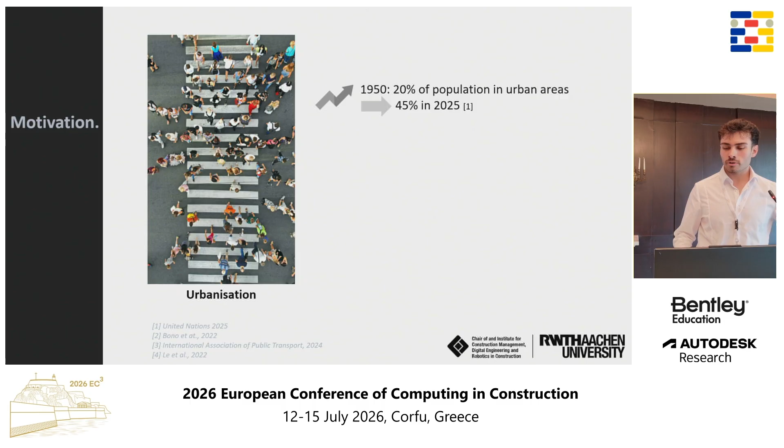So to start, let's look at some numbers on why metro tunnels are particularly interesting, especially from a sociological perspective. We can see that in the past 75 years, from 1950 to 2025, the urban population has moved from 20% of the global population to 45%. And in a similar period of time, from 1950 to 2015, the cumulative global length of metro tunnel systems has increased more than tenfold, from 1,250 kilometers to over 13,000 kilometers in 2015.

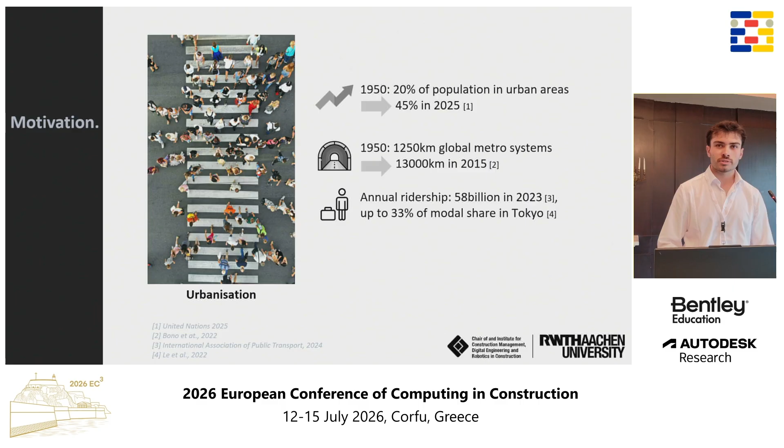And as part of that, we can observe that metro tunnels have become a crucial part of urban transportation, resulting in an annual ridership count of 58 billion in 2023, accounting for up to 33% of the modal share in major cities such as Tokyo.

Now, the second aspect is related to the maintenance of the tunnel. We already established that there is a substantial amount of metro tunnel systems available, and now they need to somehow be kept operational. Due to material aging, heavy loads, and general environmental conditions, these infrastructure buildings are prone to building damages, which are required to be inspected and potentially maintained.

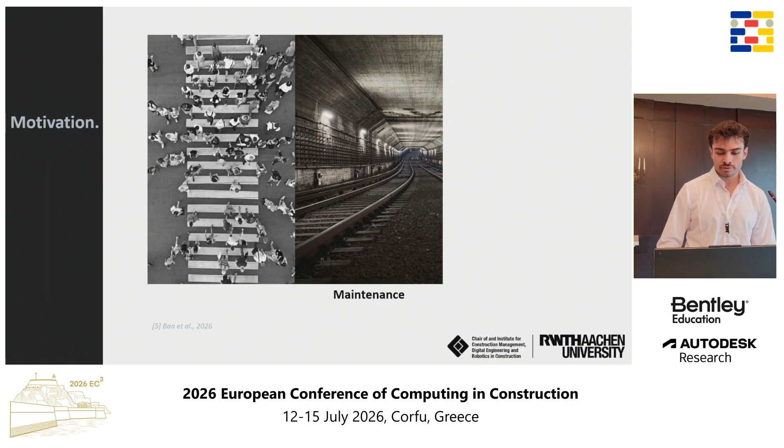I don't know if anyone has ever been inside a metro tunnel and had the opportunity to assess the conditions of them, but at least for German metro tunnels, since a lot of them were built after either the First or Second World War, they're often in, let's say, improvable conditions. So what you will find often is damages in the form of cracks, leakages, cross-section deformations, and thus regular inspections are required to assess the building conditions, plan investments, and allocate repair as well as maintenance resources.

Third, we have operational constraints that are unique to metro tunnel environments, such as timely limited inspection windows, which are during the nightly shutdowns of metro systems, and metro-specific ground conditions, including the tracks, ballast, and cross ties on the surface of the metro tunnels, and these create fundamentally different conditions compared to, for example, road tunnels.

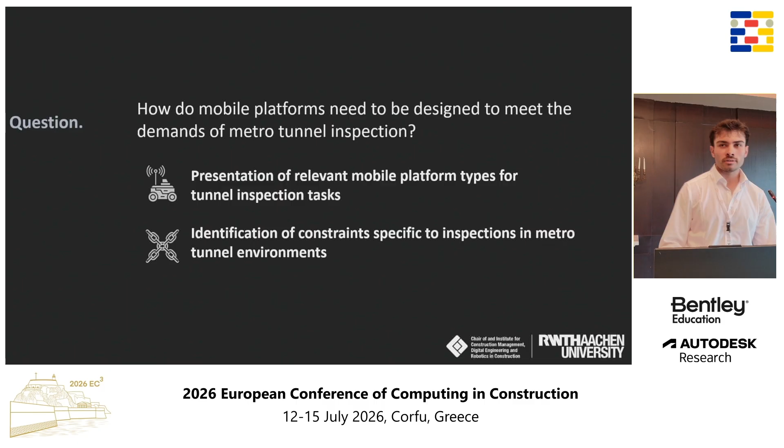So concluding these aspects, the paper focuses on the question of how mobile platforms need to be designed to meet the demands of metro tunnel inspections. To answer that, we look at three subtasks. The first is a presentation of relevant mobile platform types for tunnel inspection tasks. Afterwards, we look at the specific constraints that metro tunnel environments impose on automated inspection systems, meaning how inspections of metro tunnels differ from inspections of road tunnels, for example.

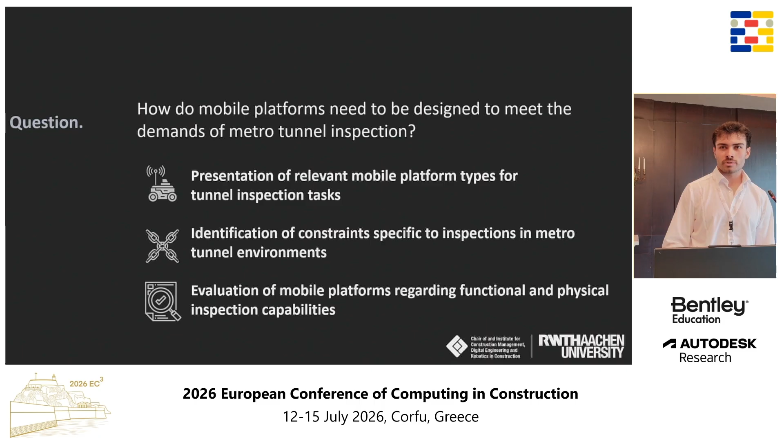And lastly, we will evaluate the mobile platforms against these constraints by looking at functional and physical capabilities of the platforms to assess how suited they are for metro tunnels. Now, before we do so, let's also take a look at the methods we use to gather our information.

We used a mixed method approach, including a literature review to identify existing mobile inspection systems that have already been developed for road tunnels, railway tunnels, and metro systems, and extract key technical parameters such as payload capacity or runtime. Then we selected publications based on the maturity of the described systems, with the goal of identifying relevant mobile platforms for automated inspections as well as their key system parameters.

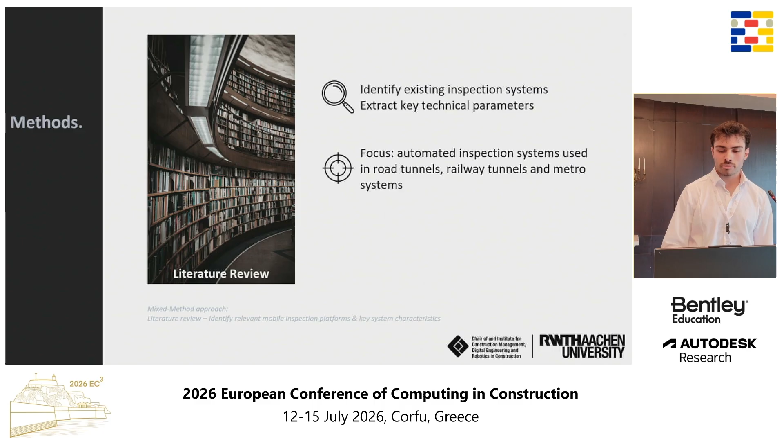Then we conducted semi-structured interviews with metro tunnel operating agencies whose participants had a broad range of tasks, from planning and scheduling to practicing on-site inspections themselves, and more organizational topics such as asset management. The main goal was to establish existing maintenance procedures and conditions currently used in practice, as well as to gather insights into operational constraints that are not represented in literature otherwise.

In total, we interviewed 6 members of German metro tunnel operating agencies, following an interview guideline on organizational processes of metro tunnel inspections, current maintenance strategies, handling of inspection data and reports, as well as operational constraints within the inspection process.

Then lastly, we got our hands dirty and did some in-person observations inside German metro tunnels during regular inspection and maintenance windows. These focus on the physical environment and infrastructural conditions inside the tunnels, documented through photos and videos, with the goal of identifying requirements that would otherwise be not represented or underrepresented in literature.

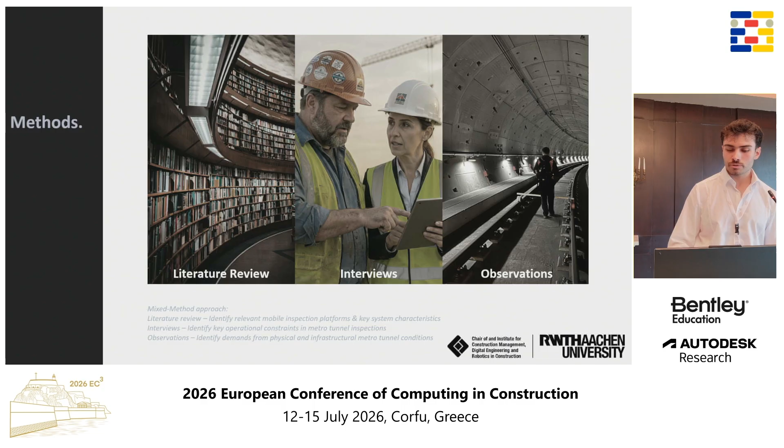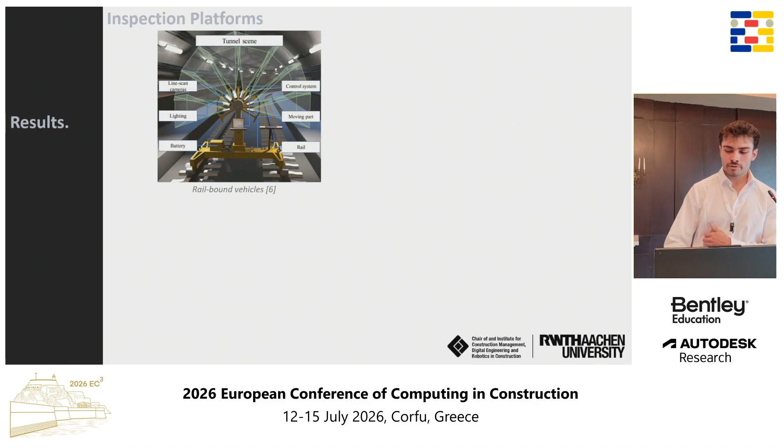Now let's take a look at the results. Starting with the inspection platforms that we identified, they can generally be classified into 4 categories. The first category can be classified as rail-bound vehicles, meaning inspection platforms that, as the name suggests, use the tracks of the metro tunnel for transportation. The second type will be summarized as wheeled and tracked robots, so any platform that uses either wheels or tracks.

They usually offer good performance in payload capacity, meaning large sensor setups can be integrated with relatively simple motion control, but they generally lack movement flexibility. Third, we have quadruped robots that mimic the motion capabilities of 4-legged animals such as dogs, which allows them to be more flexible with their movements at the cost of less hardware payload and higher integration effort due to the complex joint systems.

And lastly, we have inspection systems mounted on UAVs, meaning they are able to fly through the tunnel and can thus operate independent of what the surface conditions on the ground look like.

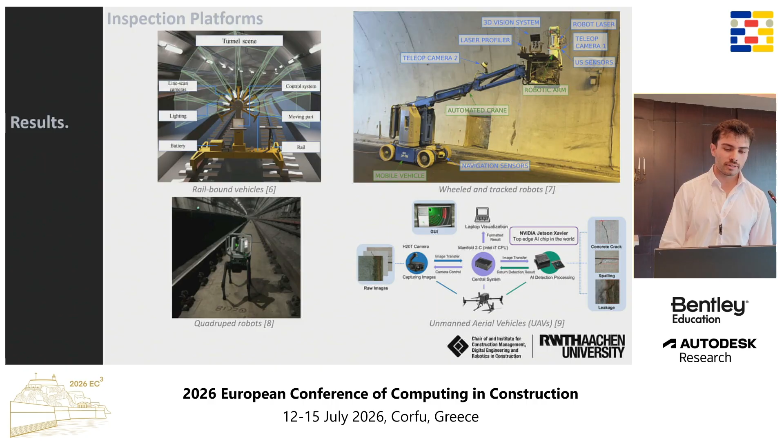Now, after establishing the main inspection platforms, we want to take a look at the specific operating constraints that we have for metro tunnel inspections, since they will usually largely differ from the conditions that we have, for example, in road tunnels. Now, the constraints are separated into 3 different domains, depending on the information source that we use to acquire a specific constraint. And starting with the literature-based constraints, we first have the fact that within metro tunnels, we operate in a GNSS-denied environment, meaning we can't rely on satellites to localize ourselves during automated inspections.

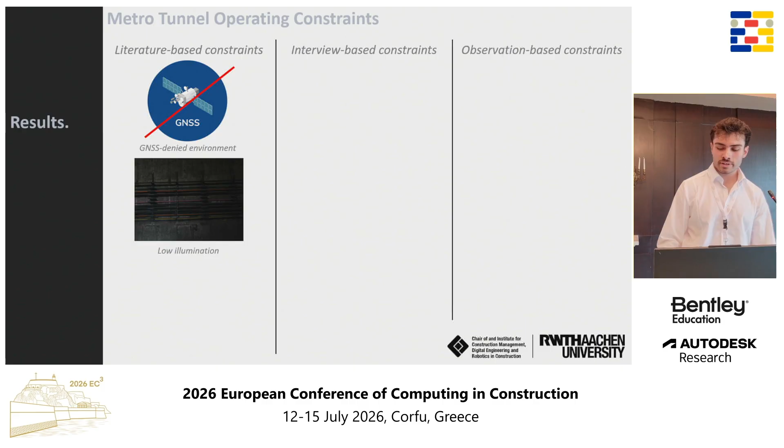Next, we have 2 aspects that go into a similar direction regarding the physical conditions inside the metro tunnel, which is low illumination, since the trains usually don't need any light to operate, as well as high dust pollution, largely due to the braking of the trains, which again make navigation and localization more challenging.

And looking at the interview-based constraints, one aspect is that, very different from other infrastructure buildings, we have limited inspection windows, which is, depending on the metro system, usually around 3 hours per day during nightly shutdowns. And what we were also told is that during these timeframes, there is maintenance work being done on the tracks. For example, if there is a damaged fastener that holds the tracks onto the cross ties and it needs to be maintained, then the rails are not available during that period of time.

And when doing the observations, we could identify 2 more aspects related to the physical environment, one being the geometry of the railway track itself and the obstacles that we have between the tracks, as well as limited tunnel access that often requires stairs or similar to get into the tunnel from the metro stations.

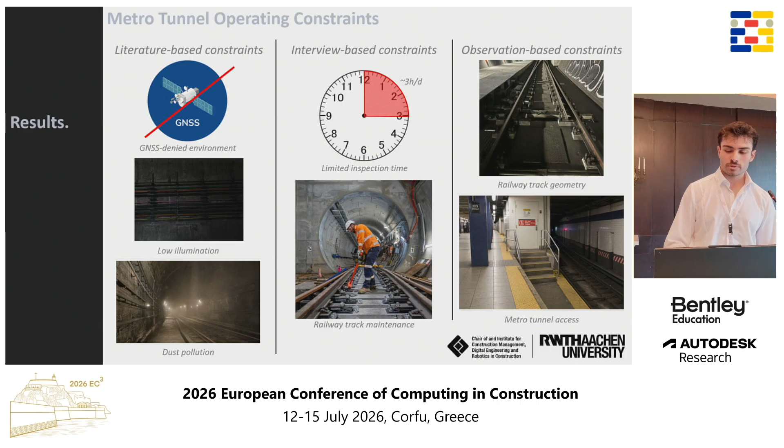Now, after looking at the platforms themselves and the operating constraints we have for metro tunnel inspections, this table shows our 4 platforms on the horizontal axis, as well as key characteristics of the hardware platforms on the vertical axis. Due to the time, we won't go over every single one of the aspects, but looking at a few of them, for example the payload capacity, we can see that rail-bound, wheeled, and tracked systems generally offer high payload, meaning they're able to carry more complex sensor setups, while quadrupeds and especially UAVs are more limited in their weight capacity.

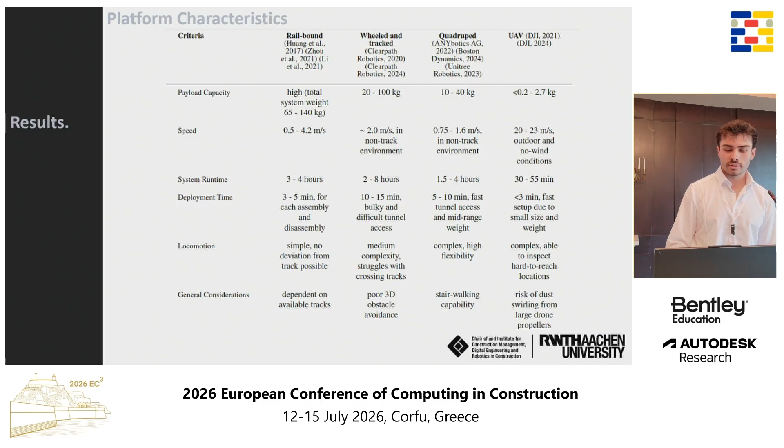And looking at the system runtime, we can see that since the inspection window is usually limited to around 3 hours, there's no real benefit of having systems that largely exceed that time period. And then we also have some general considerations, for example, that the rail-bound systems are dependent on the availability of tracks, and that the quadruped robots can have stair walking capabilities, meaning they will be able to get down to the metro tunnel from the stations.

Now, based on the operating constraints and physical platform characteristics that we just mentioned, each platform excels in specific aspects, which is why scenario-specific deployment strategies rather than generic platform recommendations are proposed. For the rail-bound systems, they generally excel in linear inspections with high payload capacity for comprehensive sensor setups, and they perform very well in long straight sections with uninterrupted track access.

Wheeled and tracked robots have generally balanced physical capabilities, being efficient on flat and continuous areas, which are sometimes on the side of the tunnel tracks, and they have limited obstacle and track avoidance, so they're best used in simple and flat sections without many obstacles. The quadruped robots offer high flexibility due to their versatile locomotion, incorporating stair climbing abilities for uneven terrain, but they suffer from high control complexity and risk of instability when slipping, for example.

And the UAVs offer fast deployment. They're independent of the ground and can access areas which are otherwise inaccessible, for example, if there is a ceiling that is blocked by an obstacle. They generally have short runtime and low payload and can incorporate less comprehensive sensor setups.

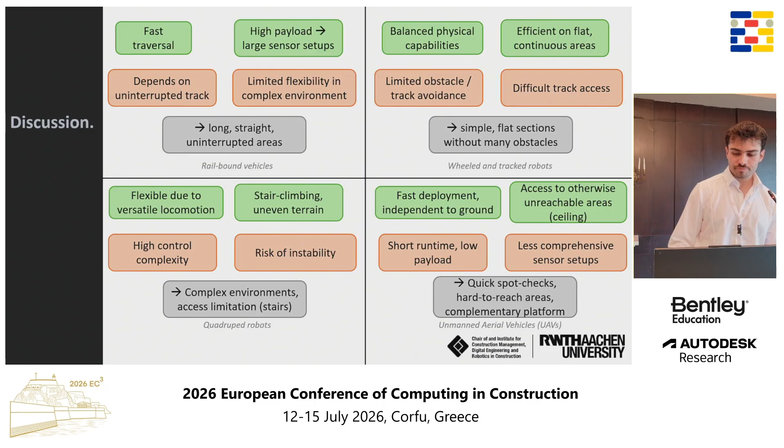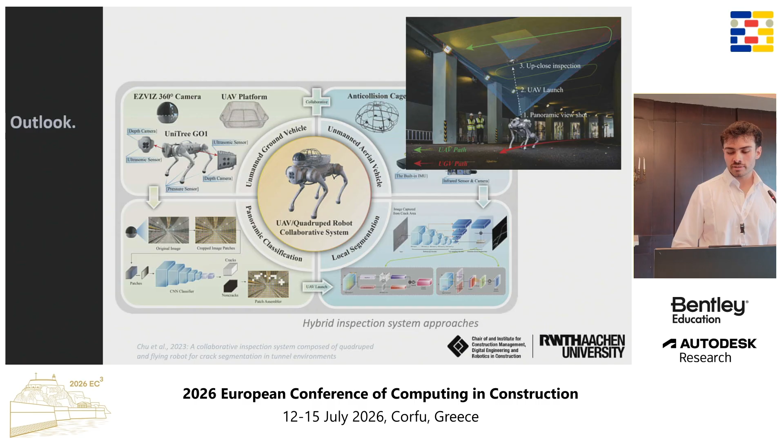So lastly, for an outlook, how should this encourage further research? We saw that each system has its own use cases and benefits, but of course you can also start to combine multiple platforms to compensate for the benefits and drawbacks of single approaches, thus enabling hybrid platform inspections. While similar systems have been proposed, such as the combination of a quadruped robot that carries a drone shown in the image, they are often conceptual with a lower level of system maturity, and there is no incorporation yet of the specific requirements that we see in metro tunnels that we just mentioned.